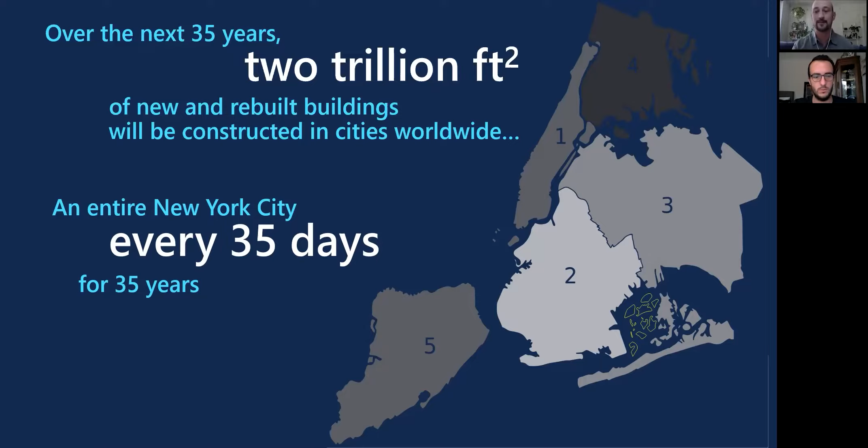So jumping into embodied carbon. Over the next 35 years, about 2 trillion square feet of construction is going to be happening. That's equivalent to an entire New York City every 35 days for 35 years. So that's going to be a lot of new buildings being built.

Almost hard to imagine. And it's important when looking at carbon emissions because currently buildings are responsible for 39% of global carbon emissions. Those carbon emissions from buildings are usually broken down in 2 buckets. The first is operational carbon, which is responsible for about 28% of carbon emissions currently. Operational carbon refers to the energy used throughout a building's life, everything from the HVAC system, lighting, plug loads, and other power throughout the project's life.

Embodied carbon, what we're talking about today, is responsible for about 11% or so of global carbon emissions. This refers to the life cycle emissions associated with building products. So everything from extracting the raw material, transporting it to factories, the manufacturing, the final transportation to site, any kind of construction emissions associated with that material, and then end of life emissions.

Just to illustrate how embodied carbon and operational carbon have been addressed by our industry over time, we can look at one building's carbon profile. This is looking at a building operating conventionally in terms of energy performance. There's a spike in embodied carbon at the beginning, and then over the life of the building, which here is about 50 years, there's a general increase in operational carbon.

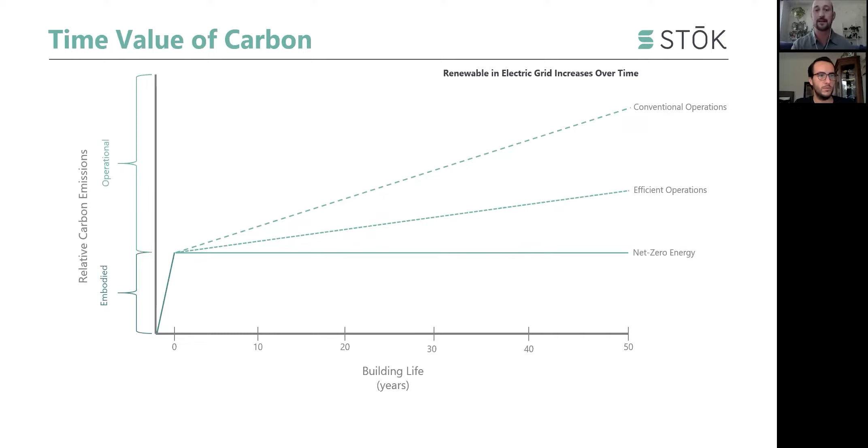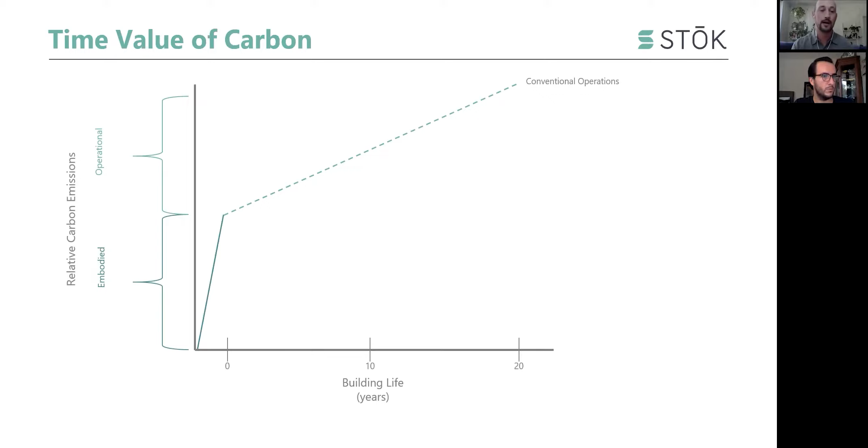So what you can see is that's really been the focus of the green building movement over the last couple of decades, and that's really left embodied carbon unaddressed. Scientists are really telling us that we need to be looking at a much shorter time frame to have a significant impact, more like 10 to 20 years rather than 50 years that some people are considering. As you can see here, embodied carbon becomes even more important to consider. In fact, when looking at the global carbon emissions of new construction from now till 2050, about half of those emissions are going to be due to embodied carbon.

And it's also important when those emissions are taking place. So there's this concept, time value of carbon. The longer the carbon is in the atmosphere, the more time it has to have damaging effects. So the embodied carbon that mostly occurs before a building is even occupied is there in the atmosphere longer and has a more damaging effect than the carbon that gradually gets released throughout the building's life due to operational energy.

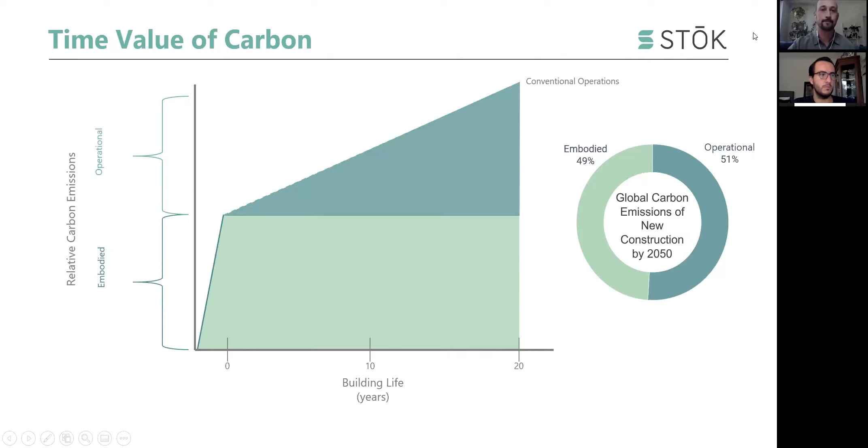So looking a bit more detail at embodied carbon life cycle stages, what we call cradle to gate emissions. So from the very extraction to transportation to the factory to manufacturing, it's cradle to manufacturer gate, essentially. And this is everything that the manufacturer really has control over for the most part.

And these impacts are disclosed in what are known as environmental product declarations, or EPDs. These are generally manufacturer-sponsored documents that state the environmental impacts of their product, including embodied carbon.

Next, the product is transported, used with construction equipment, and replaced throughout its life. There's emissions associated with that, as well as any end-of-life processes, either landfilling or recycling. All of those things have associated carbon emissions. And so that entire life cycle stage is known as cradle to grave.

And when we're trying to quantify this on a project level, we use an approach known as whole building life cycle assessment, or LCA. There we're looking to really quantify this on a full life basis, on a cradle to grave basis. When looking at these life cycle stages, they're actually not created equal in terms of magnitude.

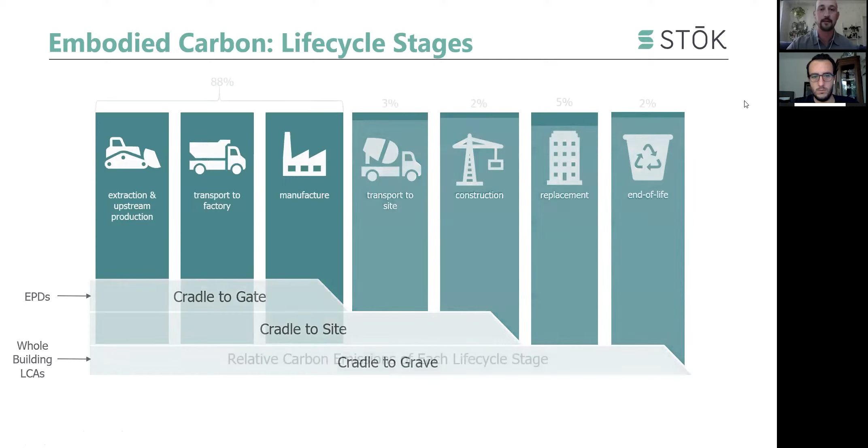This is a generalization, but generally what we've seen is that the significant bulk of emissions, almost 90%, are in that cradle to gate stage, the stage from extraction to manufacturing. So the manufacturer really has a lot of input into the emissions here.

Something to note is that transportation to site is not very significant. On average, we're seeing 3 to 5%, and this is actually contrary to a lot of other paradigms in the green building movement, where you're looking at sourcing from nearby.

While there are other benefits from a carbon perspective, it's actually better to source from further away if that product is manufactured in a lower carbon way than close by, and if it's manufactured on a dirtier grid or using coal. So really, the takeaway with this is that each situation needs to be evaluated, and that comparison needs to be made.

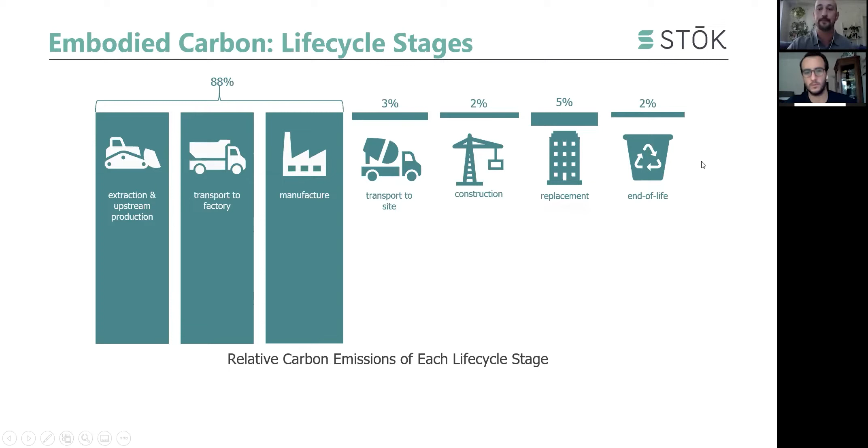So looking at a high-level overview of our process and what the recommended process is for evaluating embodied carbon, what takes the most time is understanding the quantities of your product. So we use everything from BIM models, cost estimates, to the drawings to ascertain the quantity of the material in the project.

Once we have that, we use whole building LCA software to map environmental impact data to those products. So what we're doing there, I mentioned the EPDs, that's a type of environmental impact data. We're trying to represent those building materials with the best available data.

Ideally we have product specific EPDs, but occasionally you don't have that. So you have to use either similar EPDs, generic data, etc. So the software puts that all together.

We put together a number of other assumptions for things like transportation, replacement during the building's life, the full lifespan of the building, and then we're able to get a whole embodied carbon number. And so that gives us, we can do a few things with that. That gives us the top offenders, the top 10, which Andres will go into with a few examples.

That'll give us some hot spots. We can really use that to understand where the embodied carbon is and make recommendations and make changes to hopefully reduce the embodied carbon of the project.

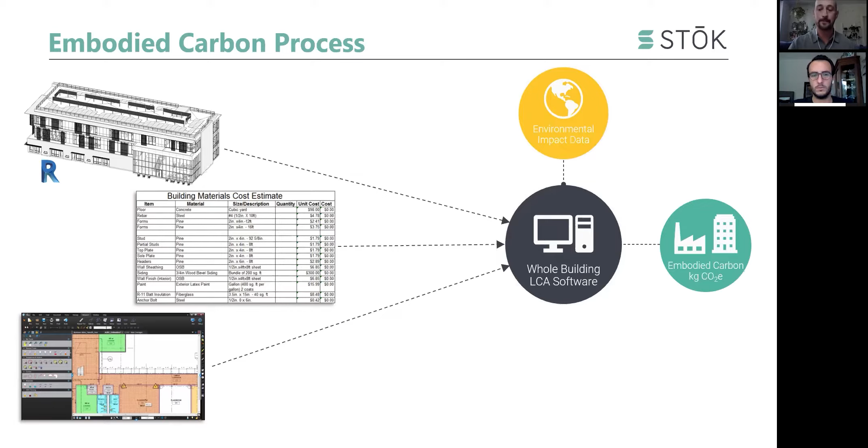I'll quickly touch on a few of the leading tools that we see available out there. So one-click LCA, it's primarily a paid tool, but we found it as being one of the most leading tools out there. It has probably the best database that exists, so we really recommend that one.

You may have heard of EC3, the Embodied Carbon in Construction Calculator. It's gotten a lot of support from a lot of big names, and this is really a totally free database of building material carbon data.

And the parent organization of EC3, Building Transparency, actually recently acquired another leading LCA tool known as Tally. My understanding is they're going to combine forces there to really make it a cohesive, leading, and I think free tool. So a lot of interesting development there.

And structurally specific, we really like to use Beacon. It's a totally free open source tool that works really well with structural BIM models, and quickly understanding the embodied carbon right there in the model.

All right, and with that, Andres will take it away. Thanks, Boris. I'm going to follow up that introduction into embodied carbon, really diving into why the structure matters by showcasing a couple of case studies of projects we've worked on and for which we've devised reduction strategies. We'll look into those strategies a little bit more in detail.

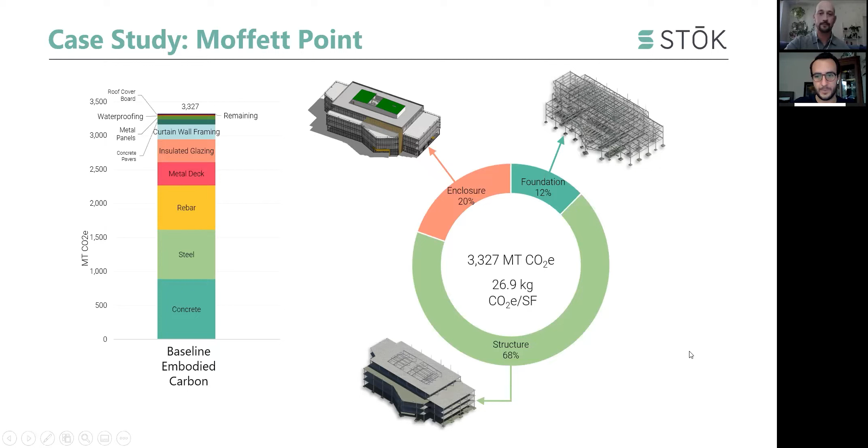For this project specifically, we calculated the baseline embodied carbon and put together a set of strategies that ended up reducing the embodied carbon by 35%. These strategies meant no design alterations at all—just a focus on material optimization and procuring low carbon materials. They were implemented at less than 5% cost premiums.

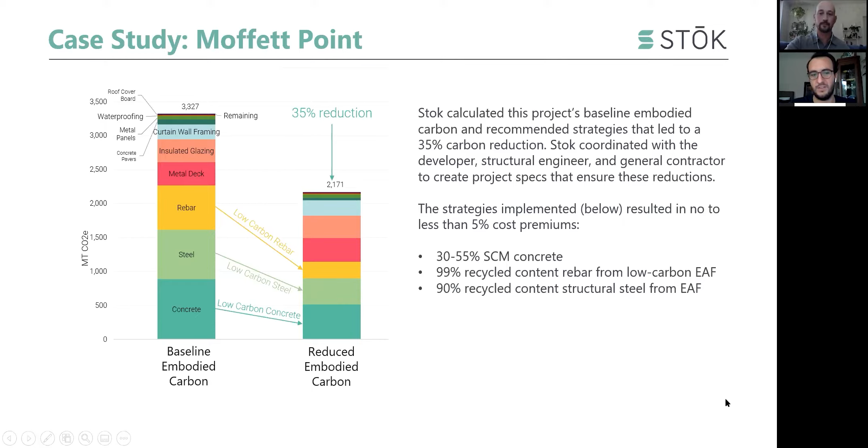The three strategies specific to Moffett Point we'd like to point out: higher cement replacement in concrete, using supplementary cementitious materials (SCMs) ranging between 30 and 55%; procurement of structural steel with high recycled content, ideally produced in an electric arc furnace; and similarly for rebar, the highest recycled content possible from a low carbon electric arc furnace, ideally from a green grid. I'll get into the specifics of these strategies when I talk about material optimization.

Tying back to Moffett Point, where the structure makes up 80% of the embodied carbon, one strategy to keep in mind—maybe the most interesting to the crowd today—is how we can work on reducing the structure. For this project in San Francisco, they looked at reducing the overall weight of the structure by addressing a more creative solution to lateral forces.

They installed 32 viscous dampers, allowing the building to sway, in addition to transfer trusses at the base of the building, as well as between levels 39 and 40, redirecting the loads to the mega columns. This more creative solution resulted in approximately 3,000 tons of steel saving. That's not only a cost benefit to the client, but we're also seeing a 20% reduction in embodied carbon versus the alternative, which would have been a stiffer, heavier building with maybe a heavy damper at the top.

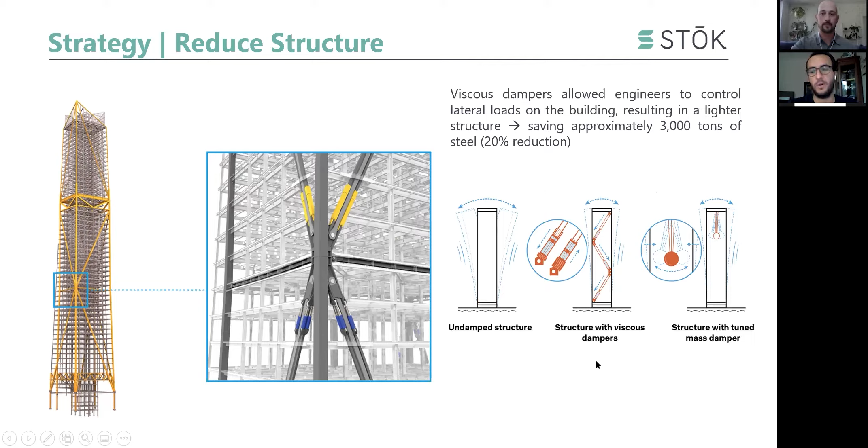Another strategy I want to talk about in relation to Moffett Point is mass timber. Although this project did not end up pursuing a mass timber structure, it was evaluated, and we did quantify the benefits in terms of embodied carbon versus a conventional concrete or steel structure.

Speaking specifically to this strategy, different types of timber have different emissions but also different capabilities of sequestering carbon. One of the big conversations around sustainability in the green building industry now relates to timber structures and biogenic carbon—taking advantage of the carbon the wood itself has stored throughout its lifetime and sequestering it in the structure rather than resulting in greater emissions, as with a more typical building.

Something important to point out is that to really quantify and take advantage of the biogenic sequestered carbon, the timber has to be sourced from sustainable forests, and there are different certifications specifically around the US that focus on this—that's just LCA best practices. We can quantify the benefits of going mass timber versus a more conventional construction method, but only if the timber was sustainably sourced, so you can guarantee that using the product in the building is preventing those emissions.

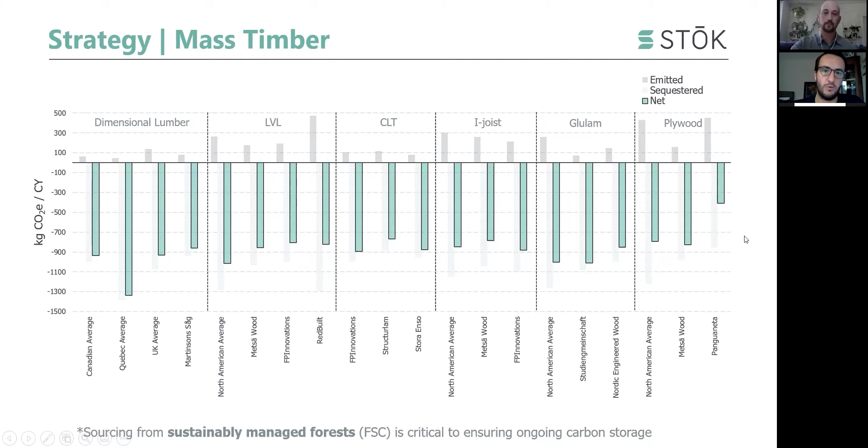But even in the scenario where timber may not be FSC certified, it's still a substantial reduction when compared to the emissions from concrete or steel.

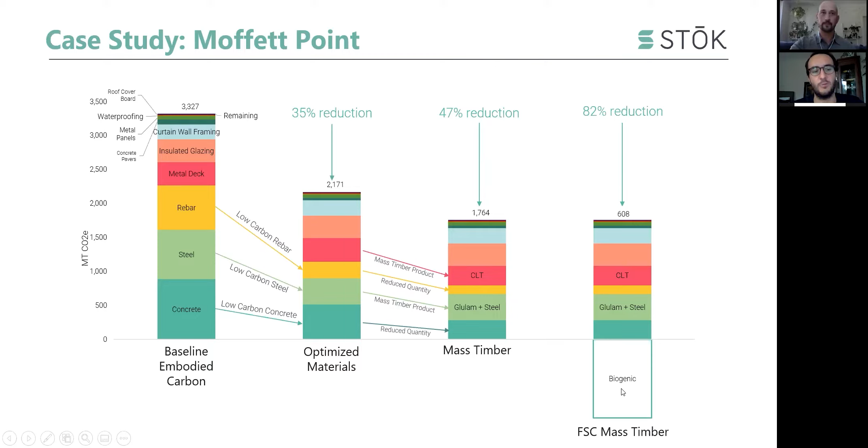A second case study I want to walk through circles more around the benefit of retrofitting existing structures and/or reusing them. The greenest building is the building that has already been built, and that's a push that's being made in the green building industry.

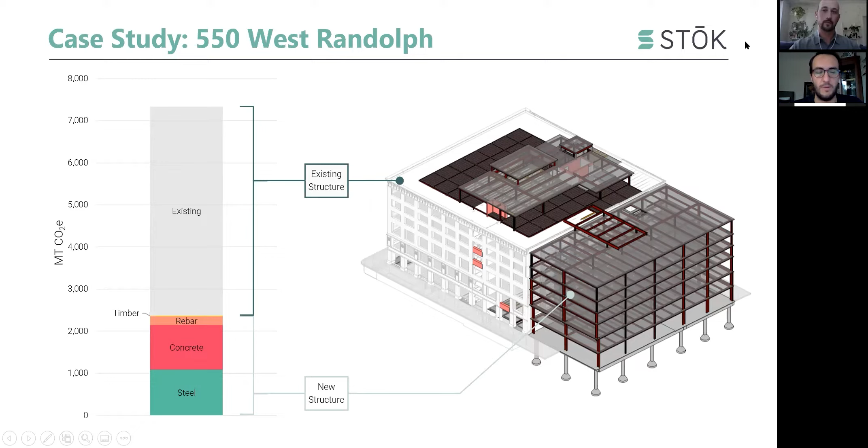This project in Chicago showcases where we evaluated the addition to this existing office space, and measured the embodied carbon of that, but we also quantified what the embodied carbon would have been had the site been completely cleared and an equivalent sized building been constructed from scratch. That's what the gray bar shows on the left—by avoiding the demolition of the existing building, the project was able to not just reduce those emissions, but really prevent them from ever being emitted.

For this mixed use development project, we quantified the carbon savings of reusing the structure, which came up to 2/3 of the emissions, and then recommended additional strategies similar to the ones I just walked through, like procuring low carbon concrete and steel, resulting in an overall 81% reduction compared to a similar completely new construction of the same size and type.

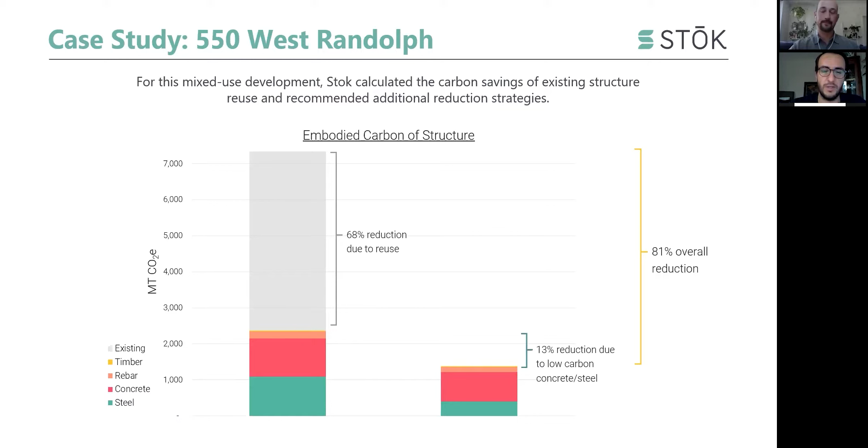Again, this focuses more on a strategy of reusing existing buildings. Doing some research into it, I wanted to point out two interesting projects I came across, one in Louisville and the other in North Carolina, where the design teams have been creative in finding ways of keeping as much of the original structure as possible, whether it's the shell, repurposing the wood from a building into a different use in the new structure, or converting a completely different type of building into something else by keeping the main structure and maybe adding some elements.

In the example of the High Point, North Carolina project, they kept the original manufacturing mill columns, the enclosure, and the floors, and added an atrium that connected both wings of the building with a new glass elevator core and a snake stair surrounding it to access both buildings. These are just examples of how you can get creative in finding a use for buildings that are already out there, therefore avoiding unnecessary emissions.

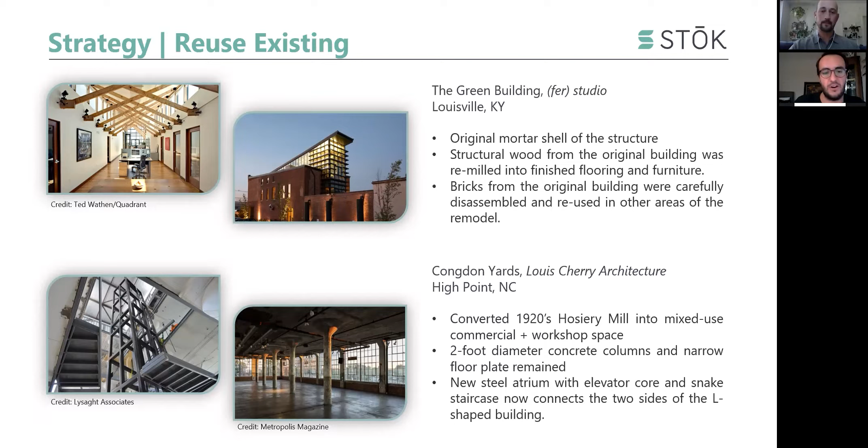Adding to the scope, these other two projects were focused on the core and shell of a building, resulting in the majority of the emissions being in the structure and the foundation, with the enclosure making up the rest.

However, we also carried out this study for an office building and parking structure, where the interiors of the project were also quantified. What I want to emphasize and identify is, even with interior finishes and furniture included in the scope of measuring embodied carbon, the structure itself is still 2/3 of the impact. So even zooming out and taking a more complete view of everything that goes into a project, we're still seeing the main emissions being concrete, steel, rebar, and metal decks. Other components start playing into the mix, but it's still 2/3 of the impact, which highlights the importance of focusing on reduction strategies that address the structure of the project itself.

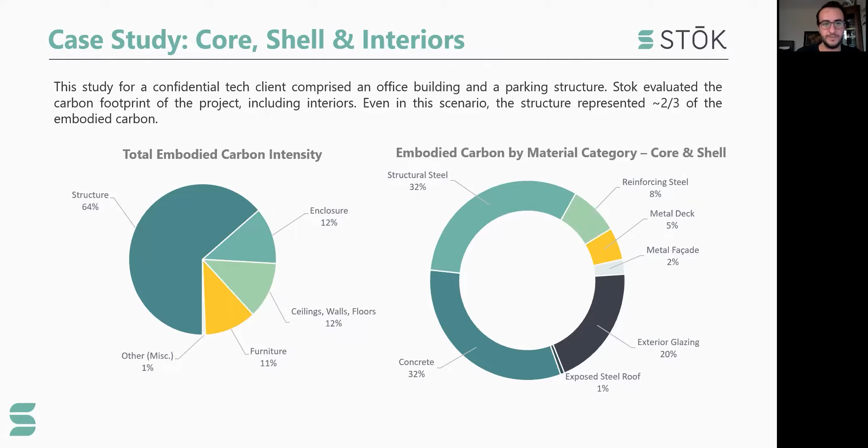Which takes me to discuss these high impact materials and optimization strategies that we recommend.

Diving in first into concrete, although cement represents a small volume of the entire concrete mix, it contributes to nearly 95% of the embodied carbon per cubic yard of concrete mix. Overall globally, cement production itself is responsible for 8% of emissions. So we know we won't be able to get rid of cement in the industry. Concrete's still going to be used, but there are ways we can make more efficient use of the cement and replace it where possible.

We're seeing that you can achieve a 10 to 50% carbon reduction by some percentage of supplementary cementitious materials, be it slag, fly ash, or glass pozzolan, typically ranging in the 20 to 40%, some projects even going up to 50%. And then some concrete suppliers are evaluating how the mix would perform if we go even beyond that threshold.

And then secondary strategies, with lesser carbon reductions but still significant, is considering using other types of cement like Type IL, or breaking technologies like CarbonCure that inject already emitted carbon dioxide into a mix, therefore keeping the same strength requirements while reducing the cement content of a project. Sequestering carbon as an aggregate or recycled aggregates are also being explored, but these are more secondary strategies that we recommend behind the big problem: the less cement you can use, the better.

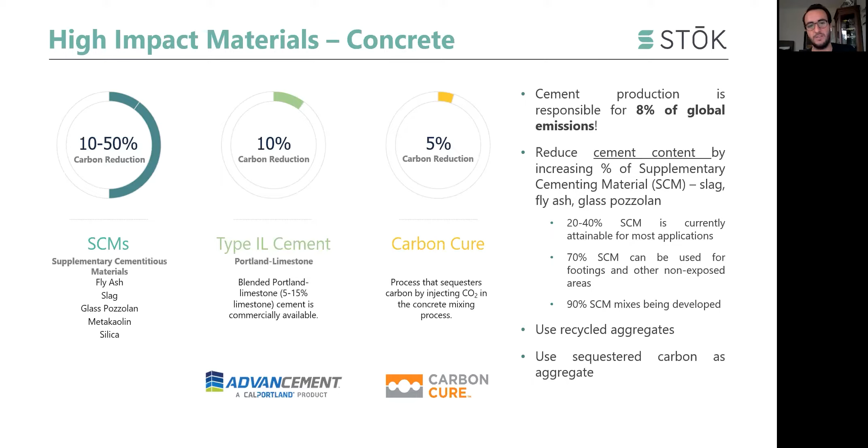Going into steel, I think what is important to point out, and where engineers can have an impact, is in specifying where the steel is coming from in the general notes language and specs language, understanding the two ways that steel is produced. The most common is the basic oxygen furnace.

The problem is it relies on fossil fuels to be powered. So although it makes up the majority of global steel production, it is the reason why we're seeing high emissions from this manufacturing process. It's typically used for HSS shapes as well as metal deck.

On the other hand, you have an electric arc furnace. In the United States, it represents 70% of US steel production, so the US is definitely ahead of the global average in how steel is manufactured. The benefit is that you can achieve higher recycled content in the steel, and since it relies on the electric grid, as the grid gets greener, it results in even greater embodied carbon reduction. Typical sections manufactured this way are angles, channels, wide flange beams, and rebar.

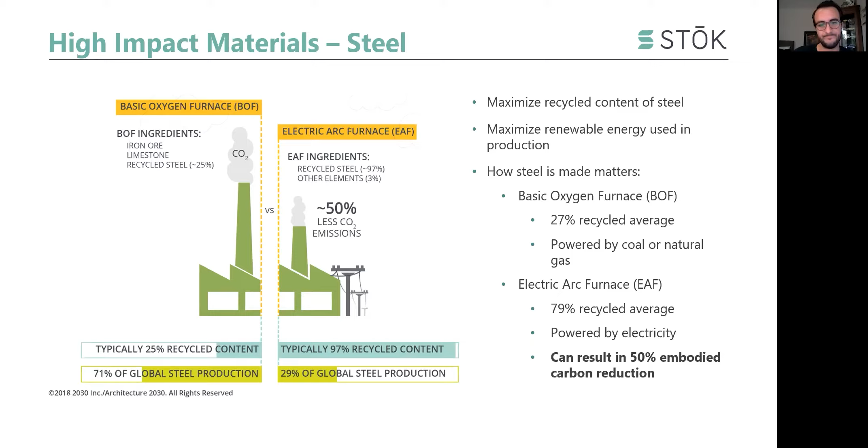I'm going to dive into SE 2050. I know we've left some time for questions at the end, so if everyone's okay with that, I'll continue and leave an open Q&A at the end, unless anyone has any pressing or immediate concerns with what's been discussed so far. If not, I will dive into the SE 2050 commitment.

The SE 2050 commitment was publicly launched in November of last year. It's very new, but in just these past couple of months, a lot of structural engineering firms have signed up. The mission of this commitment is really about the architecture industry having their 2030 challenge, focused on the architectural side to address embodied carbon and implement strategies to reduce the carbon footprint of the built environment. The structural engineering industry felt we were kind of attaching to the AIA 2030, but we didn't have any guidelines or commitment ourselves to really guide the process.

So it was brought together by the Structural Engineering Institute with a lot of support from the Institution of Structural Engineers in the UK, the Carbon Leadership Forum, and what came up is this commitment of SE 2050. It was published just at the end of last year, getting support from the UK Institution of Structural Engineers after they declared a climate emergency in 2019, as a reason to address embodied carbon in the built environment, as well as from the SEI Board of Governors who formalized it as a program in early 2020.

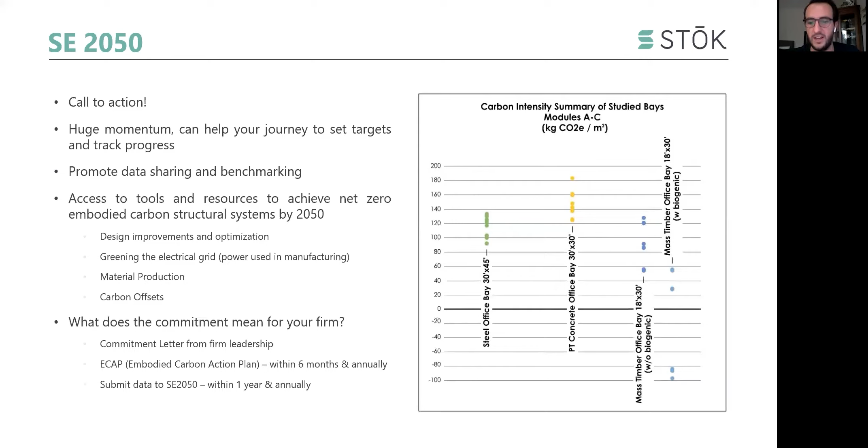A bit more into what this means: by providing data, you're helping build a more robust database to inform those benchmarks and targets that are going to be set for the industry and improved as the process moves along. They're currently launching a beta database in order to reduce that data variability. Some of the things they would typically ask the structural engineer to input include a brief description of the structural system and the project itself, and for whoever's carrying out an LCA, a life cycle assessment, understanding which tools were used, whether biogenic carbon was included or excluded, and the results as well. This is all to build embodied carbon intensity data that will be shared between the firms and the commitment, and to create those benchmarks and targets for the industry.

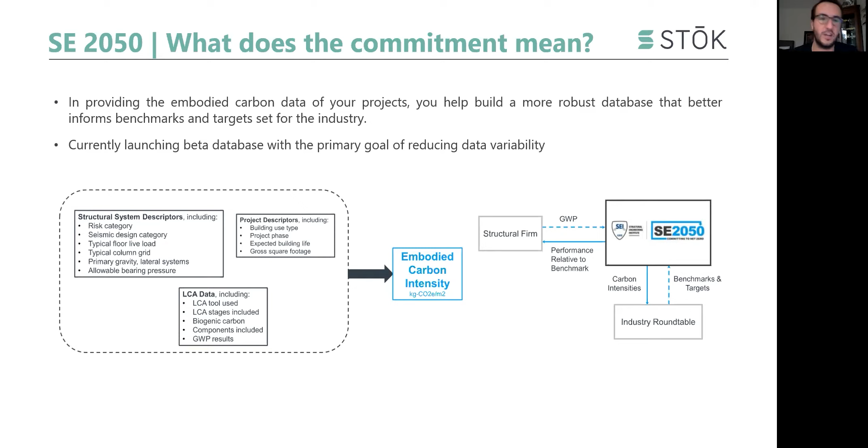Here, really, the objective is education, reporting, reduction, and advocacy, with the intention of building a culture of change. I mentioned it was just launched in November of last year, so it's been 8 months since the launch, and they've already managed 47 firms to be officially on board. I heard recently that 3 more signed up in the last 2 weeks. They're just formalizing the requirements and documentation I just touched on. So this goes to show there's huge momentum, and it could really help that collaboration in the industry.

To wrap up, diving into some of the key takeaways of this embodied carbon introduction, why the structure matters, and what the structural engineering industry is doing with SE 2050. I want to touch on why it's relevant to all of you guys, right? So why, as a structural engineer, should I care about this? What can I do differently?

It's again to emphasize the big portion of the pie that structure and foundations represent, and the high carbon intensity of the materials we typically use in construction. With that in mind, I consider structural engineers to have the key to embodied carbon reduction, as we are in charge of the design and what materials end up being used in a project. So design optimization can really go a long way.

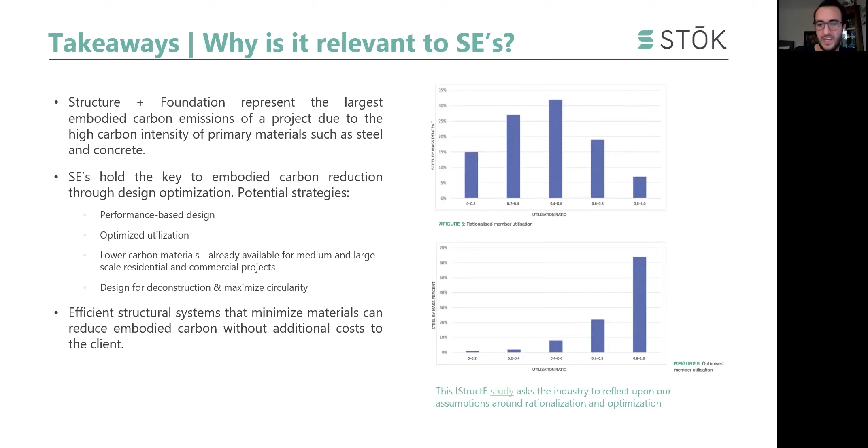Sometimes emphasizing leaving the structure as the finish itself addresses more of the interior scope of embodied carbon. There's a lot, specifically with concrete and timber, of having the structure itself also be the architecture of the building. And lastly, designing for deconstruction and circularity—knowing what will happen to this building at the end of its lifetime and seeing where it can go from there.

Considering reduced loads, what other structural systems should be considered—really what some would call structural optioneering early in the design, and seeing where you can go in terms of the carbon footprint of the building.

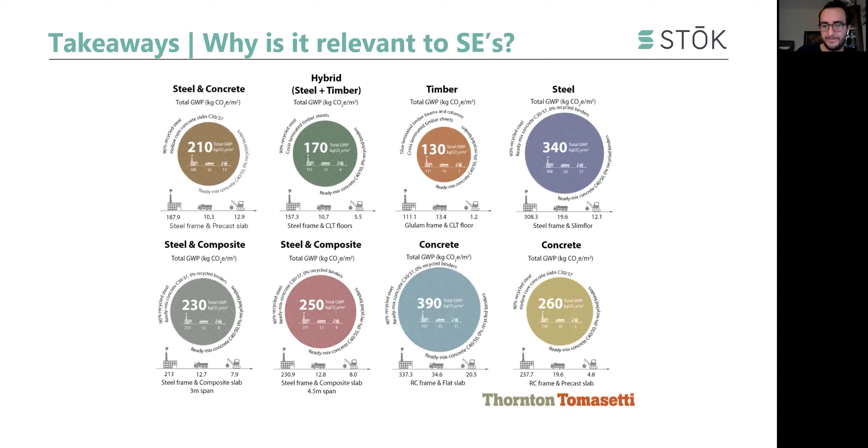How structural engineers can help is, again, advocate for sustainable design, making design decisions based on embodied carbon—following something like SE 2050, where a firm commits to tracking and reductions over the next couple of years, which is, as Boris mentioned, the time value of carbon. And there was a quote earlier that we can't just wait till emerging technologies take care of offsetting emissions, but rather take a more proactive role.

The next phase relies more on technologies currently being developed or under research, or where scaling up existing technologies is necessary. They consider it imperative to boost research, development, and innovation so that in 10 years' time, when we exhaust the gains we can take advantage of in the now phase, what we're prepared to do now ensures we don't lose pace and have new approaches to keep making carbon reductions year over year in the coming decades.

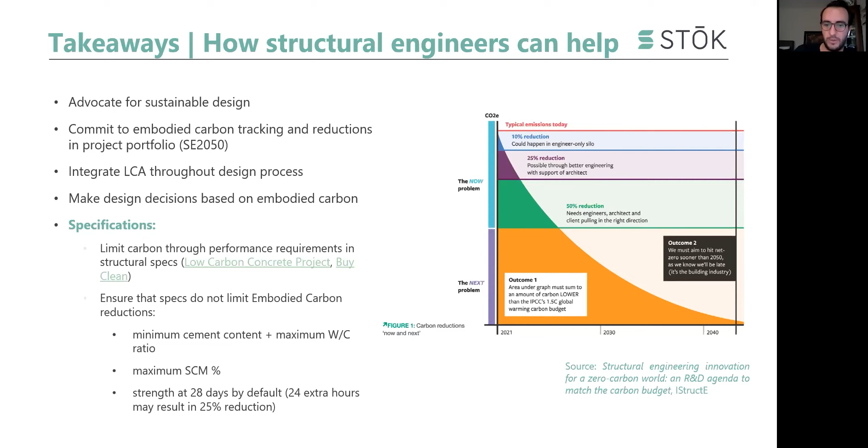Thanks, Andreas and Boris, we really appreciate it. Does anybody have any questions? I have one to start with.

You mentioned a max global warming criteria for concrete mix designs. Is that readily available historically in concrete mix designs? Have you seen that? I hadn't heard of it, so I'm curious because I'm sure it's going to come up.

I can answer that one. What's great for that specific topic is there are a few policies we can look at. The leading policy is the Marin County Low Carbon Concrete Code, released in 2019. That was really a collaboration with a number of top players to figure out what those limits should be, and they have specific limits based on concrete strength. What's really great is they have GWP limits, which you can only get by really having an EPD, but not every concrete mix has an EPD. So for those that don't, they have maximum cement content by strength.

And so we've actually worked with some clients to implement that on their own projects, through their specs and general notes. And a lot of other municipalities are really looking at Marin County as a case study of what they could implement in some larger cities.